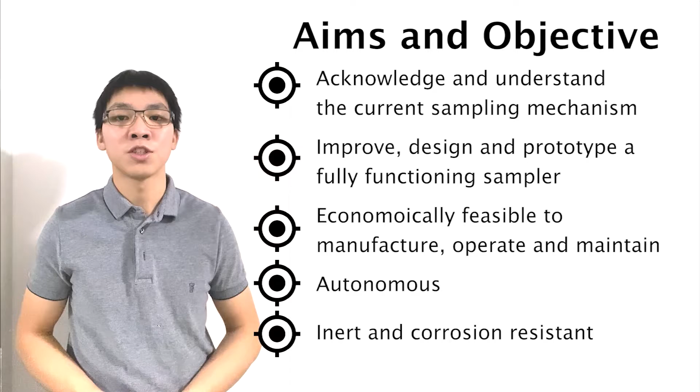Then improve, design and prototype a better version that is both autonomous and economically feasible to be deployed to a developing country. The system has to be simple, robust and reliable with the use of proper material that will not leach or react with chemical compositions or analytes found in water. In order to achieve this, a design flowchart was made. This acts as a systematic guide for the entire project while being able to identify key design phases.

The selection process undergoes the same methodological process in which the best and most suited design will be selected. The selection process includes the use of quality function deployment, Pugh matrix, system comparison, and cost comparison. Cost is particularly important in this design project as the system will be required to be deployed to a developing country. As such, a simple cost comparison was made for the different designs based on manufacturing cost, operating cost, maintenance costs, and replacement costs.

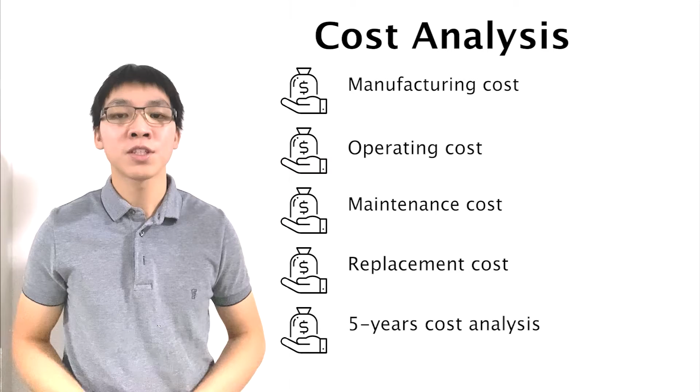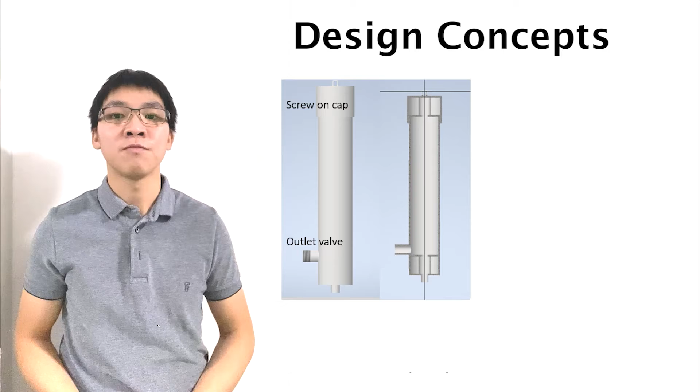The operating cost takes into account the local labor cost for the entire duration of sampling. Adding to that, a 5-year cost analysis was also done to compare its deployment feasibility. A total of 3 design concepts were made. The first design, as seen on the left, is an improved version of the reusable double check valve bailer, and a second design on the right uses a pump.

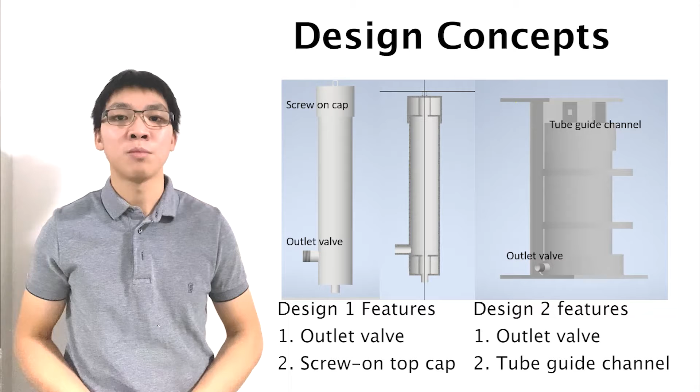Design 1 also has a screw-on top cap that allows the bottle to be accessed easily for cleaning and decontamination. Design 2, on the other hand, features a tube guide channel that acts as a support and guide for the inlet tube to feed water directly into the inlet of the bottle without coming in contact with it. The final and selected design is an improved version of the Van Dorn bottle with 1.5 litre capacity. This design features a newly designed closing mechanism that uses a magnet instead of the traditional messenger.

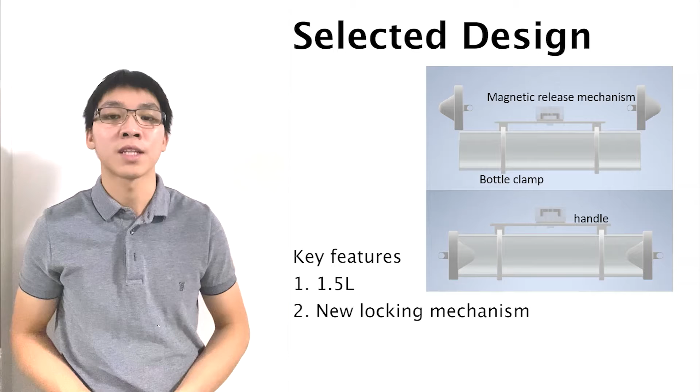This ensures that the triggering of the locking pin is almost certain every single time regardless of how deep the sampling is. Besides, it also has a detachable bottle clamp that allows different bottles to be used for different sampling conditions and environments. The free space beneath the handle can be used to attach in situ measuring sensors. This includes pressure and temperature sensors.

This is a particularly important feature for sampling in the Yamuna River, as the pressure sensor will be able to distinguish between the foam and water layer. On top of that, the use of these in situ measuring sensors allows for different stratified layers to be identified. Here's a short animation of how the bottle will work.

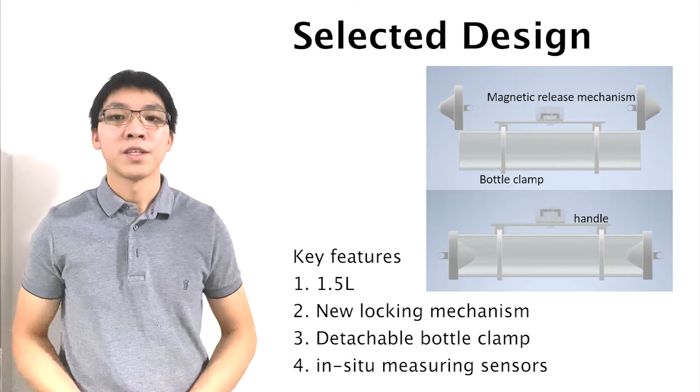Several tests were conducted on the final prototype. This includes a sampling volume test and a leak test. The purpose of the sampling volume test is to understand the sampling limit of the bottle when being submerged in water. It is particularly important that the bottle is filled completely with very minimal gas pockets as they tend to expand when being retrieved. This will affect the sample content.

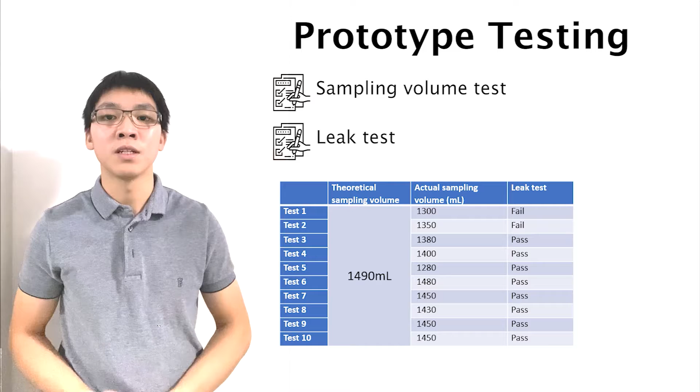The purpose of the leak test is to ensure that the bottle provides a relatively tight seal when sampling. As summarized here, the first 2 leak tests failed because of the latex tubing in the middle of the bottle. Through this test, the process of prototyping can be said to be a success where the bottle is able to perform its necessary tasks.

However, further testing is still required where the bottle will be put under adverse weather and water conditions to allow the operator to fully understand the capabilities of this design. Besides, several improvements can also be made on off-the-shelf components to increase its operational lifetime, to minimize replacement and maintenance. Before I end, how is this autonomous and how will it move?

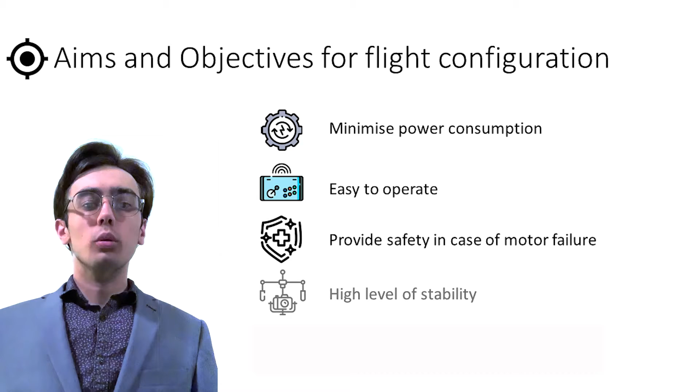It is clear to modify our drone to have a water sampling device attached underneath. It would need to accommodate a moderate payload capacity and possess a high level of stability to facilitate the sampling of water. The drone's flight system would also need to be carefully implemented to allow for a medium flight time, as well as include several safety features to protect the drone and drone operators.

Using a simple and concise design methodology, a suitable solution was developed which could successfully provide the necessary lift required to comfortably fly the drone whilst maintaining a high degree of precision and safety. This was done using common design methods such as a quality function deployment and a Pugh matrix. These tools helped accurately translate the customer requirements into relevant technical specifications, as well as ensure the final design could effectively fulfill them.

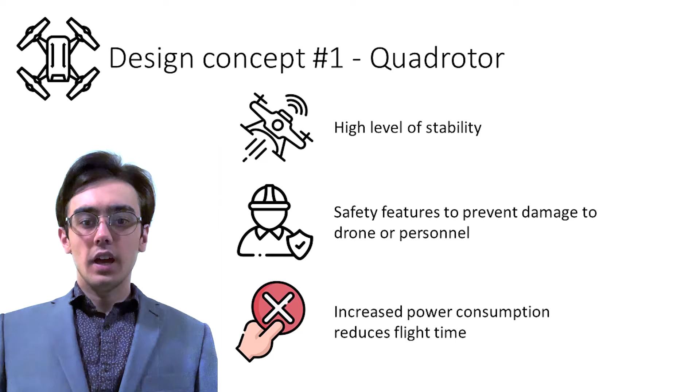The first design concept put forward was a quad-rotor drone. This multi-rotor drone exhibits high levels of stability and is easy to operate and maneuver. More importantly, the rotor configuration is able to use its multiple rotors to help reduce the risk of the drone being damaged in case one of its motors was to malfunction whilst in the air. However, this drone configuration suffers from low efficiency due to the increased power needs from the multiple rotors. To become a viable option, this design would need to minimize power consumption to prolong flight time.

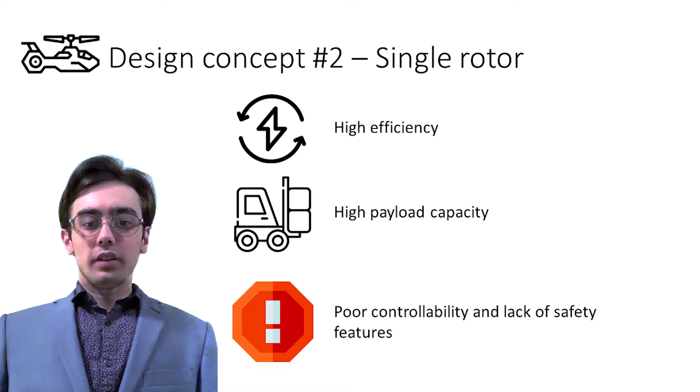The second design concept was a single rotor drone. This drone rotor configuration is very efficient, which allows it to carry high payload capacities for extended periods of time. By only using a single rotor, the length of the propeller blade can be easily adjusted to increase the amount of lift produced. Unfortunately, this drone design is difficult to operate and lacks the backup rotors that multi-rotor drones have. To integrate this design, this drone configuration would need to become easier to control and be modified to include safety features to protect the drone from external damage.

The final design selected for the flight system of the drone was a hexarotor configuration. This multi-rotor drone is able to meet the medium payload capacity required by using an additional 2 rotors. Furthermore, this multi-rotor configuration benefits from the extra 2 rotors, which can be used to safely guide the drone down in case one of its rotors were to cease function mid-flight. To prove this design could indeed provide the necessary thrust to comfortably lift the drone, thrust calculations were performed.

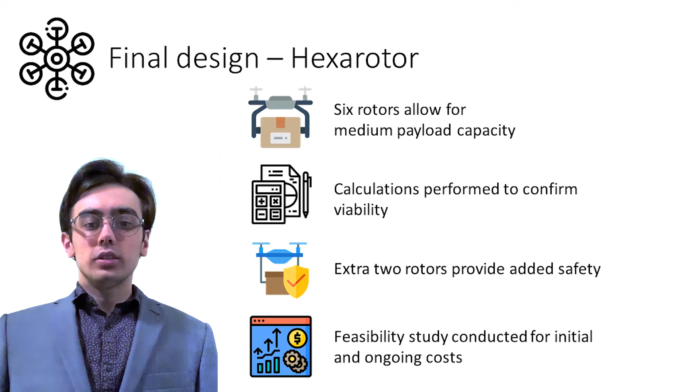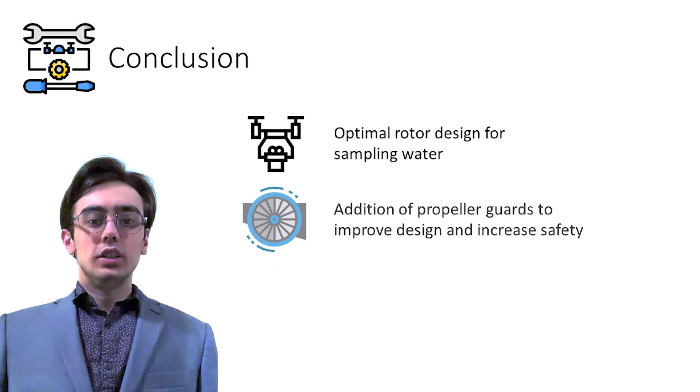Moreover, to further validate this design, a feasibility study was conducted to outline the initial and ongoing cost over a 5-year period. This hexarotor configuration was shown to be an optimal design solution for the purpose of sampling water using a medium payload capacity. To further improve this design, future recommendations were put forward, which included the addition of propeller guards to increase the protection and safety of the propeller blades.

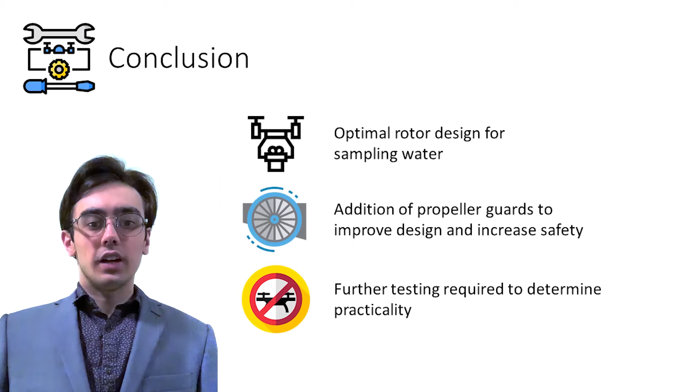Due to restrictions, future testing was also needed to confirm the practicality of this design in the field. Whilst this hexarotor drone configuration was proven to be a feasible design, the chassis would also need to be modified to allow this flight configuration to be fully integrated.

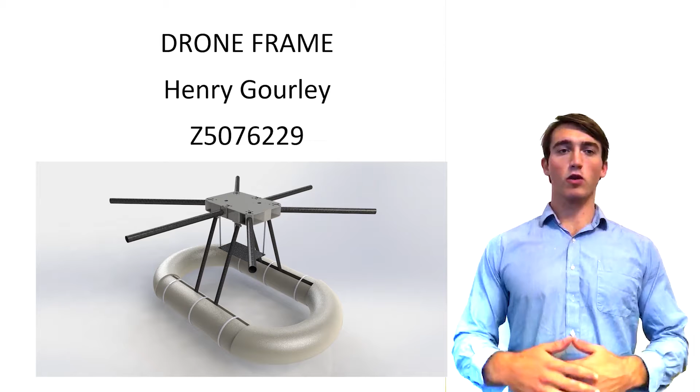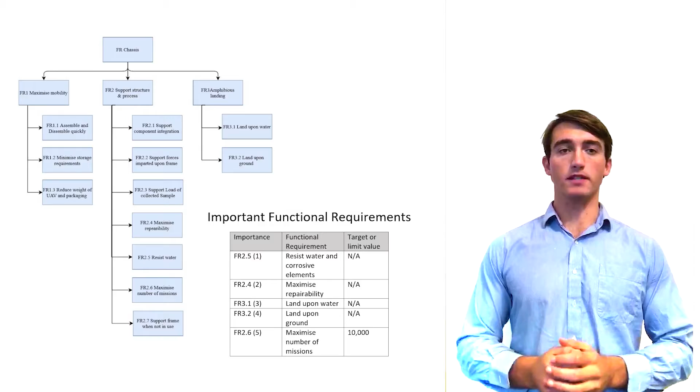Functional requirements relevant to chassis design were developed to optimize stability, structural support, and amphibious capabilities, with a QFD analysis revealing additional consideration and weighting to be given to water and chemical resistance, repairability, durability, and ground and water landing requirements. Corresponding design parameters were then constructed to assist in the development of conceptual designs via a morphological matrix.

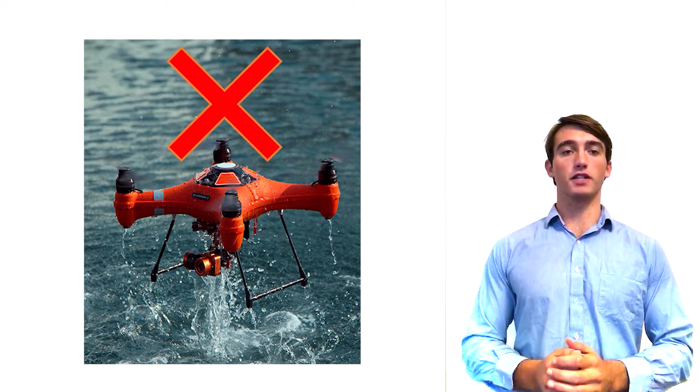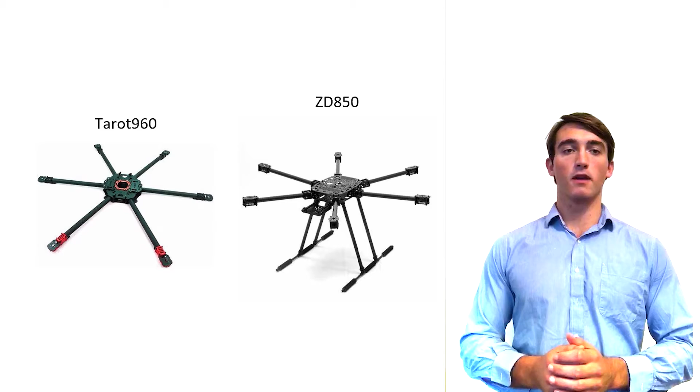Now, Thesis A identified that heavy lift, waterproof drone frames were not commercially available. However, it also revealed the modification of an existing off-the-shelf drone frame to be more feasible than a fully customized frame. As such, the Tarot 960 and ZD850 were identified to best reflect the design parameters of concepts 1 and 2, with a Pugh matrix revealing the ZD850 to best satisfy functional requirements and ease of modifiability.

Foldable propeller arms improve portability, high-strength carbon fibre members reduce weight without compromising structural performance, and a modular system supports repairability. The original ZD850 central housing plates comprise a range of slot and hole configurations to outfit different component integrations. However, the resulting porosity essentially precludes operation in proximity to water.

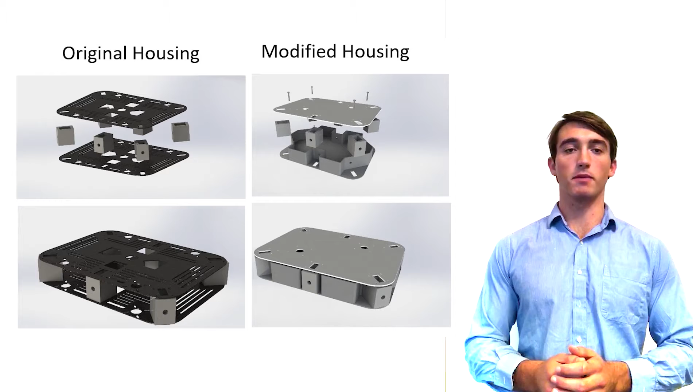A purpose-built drone such as this doesn't require these integration flexibilities, so a customized watertight central housing was constructed from ABS, with 4 reinforced screw mounts added to ensure waterproofing and ease of access for inspection and repair. Weighing only 61 grams more than the original housing, this supports a feasible modification.

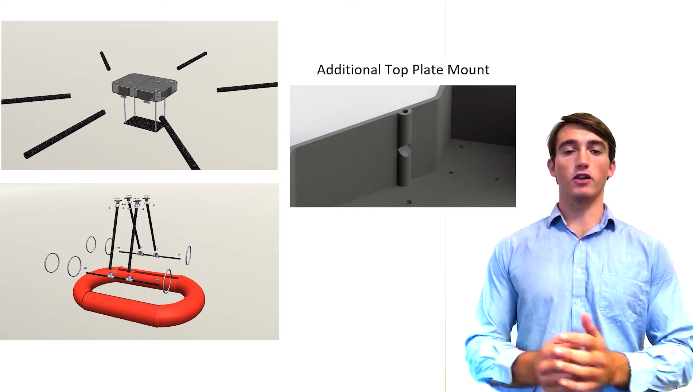Component integration was also designed to align the drone's centre of mass with its geometric centre, thus improving flight stability, and holes were created allowing circuitry to access motors, navigational equipment, and batteries. Carbon fibre members were also sprayed with a UV and water-resistant coating to maximise durability.

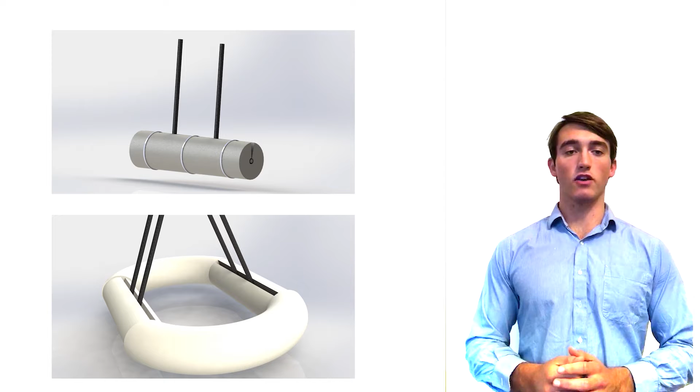Landing legs were outfitted with a closed-cell polyethylene pool noodle capable of providing the necessary flotation to support an additional 4 kilograms more than the expected maximum payload, acting to conserve battery power while sampling and prevent loss over deep water bodies in the event of critical failure.

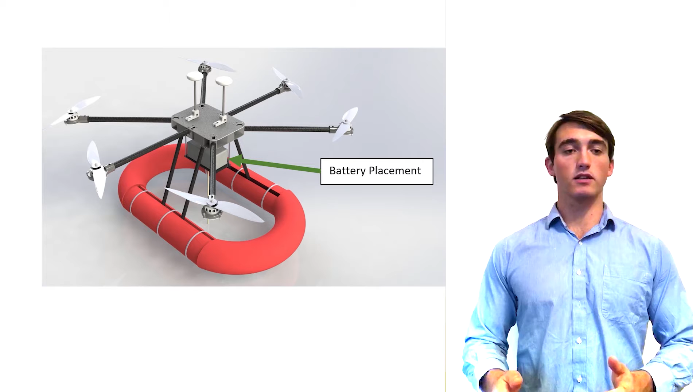The battery was placed upon the bottom rack to lower the centre of gravity from 17 centimetres to 12.5 centimetres above the ground, thus improving stability upon floating. The redesigned ZD850 shown here weighs only 1.25 kilograms and can support an 8 kilogram payload, meaning it is more than capable of carrying the required mass.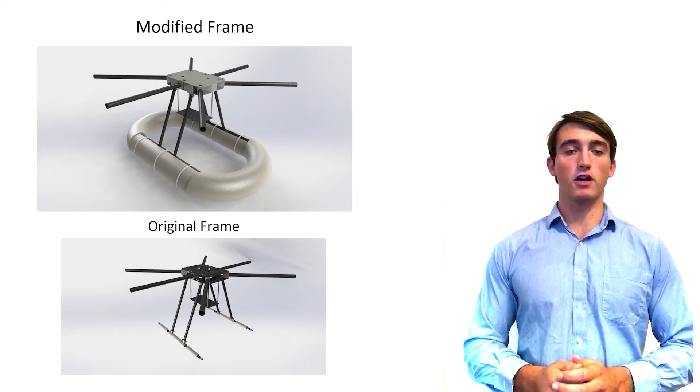I will now pass it over to Alex to talk about flight control and planning. Thank you, Henry. So in my section, I'll be going through 3 of the many hardware and electrical components that will help this whole drone work.

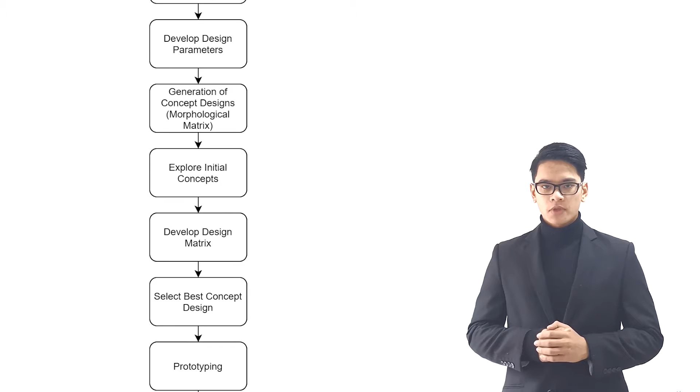The aims in my section were to find a method of manual control, to select the optimal control algorithm for flight stability and maneuverability, to develop a path planning algorithm for optimal trajectory, as well as finding an effective processing unit to process multiple algorithms. So it all starts with a design methodology, where following this framework will ensure my final design is adequate. These are the multiple design parameters that I found, and they all went into a morphological matrix where 3 initial designs were made.

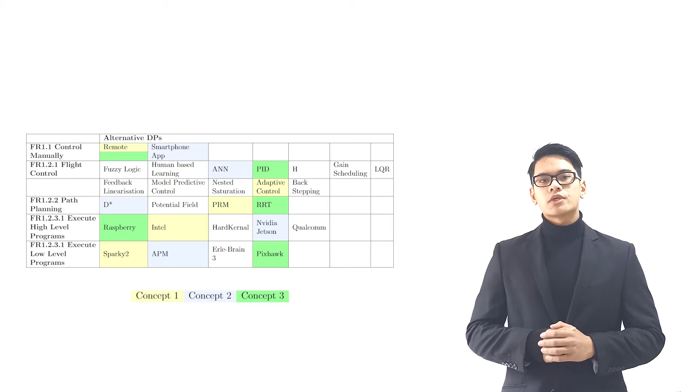So let's get into these concepts. In terms of manual control, the smartphone app has become increasingly popular, where you only need one device for live video broadcast as well as manual control. And it's definitely amazing to incorporate within a product. However, personally developing an application this early in the stages of development does not seem feasible, so a remote control is recommended.

For flight control, the algorithm isn't the only component for stabilization. It's the complex synergy between peripherals. So developing from scratch seems very hard, and purchasing may seem more feasible as they're currently very mature and have been developed over a decade. So 3 path planning algorithms were placed in the same experimental environment, where the D-Star provided an adequate path but a long processing time. The PRM had the same processing time, however, a more optimal path, and the RRT method had a shorter processing time with an adequate result.

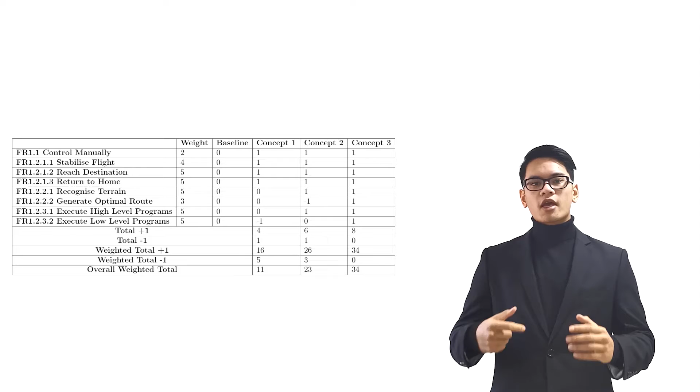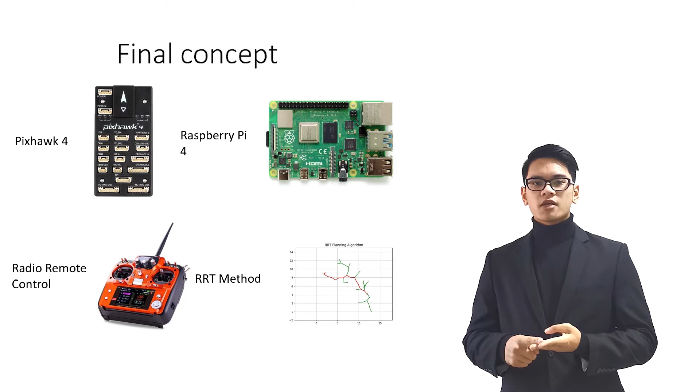A feature cost comparison was made between the high and low level processing units and considered for the final selection. And the concepts and the FRs were compared together through a Pugh matrix, where overall the third concept was decided, which was the use of a Pixhawk 4, a Raspberry Pi 4, a remote control, and the RRT method. So let's get into the final validation of the RRT method.

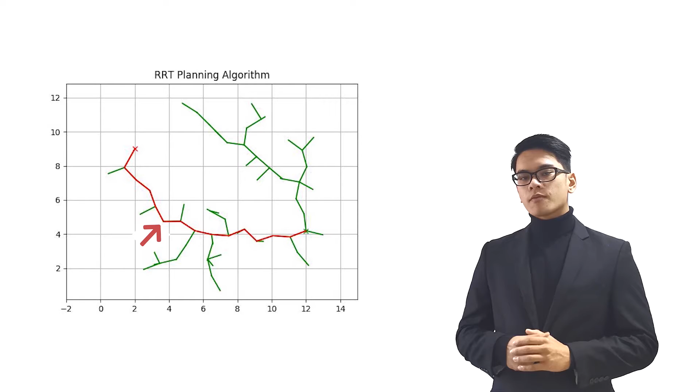And a path planner was made and produced a definite optimal result. So it was also placed into a 3D environment, however no object data could be incorporated due to time constraints. So to conclude, the radio remote control will be used as the manual controller, the PX4 system will be used as the flight control, the modified RRT method will be used as the path planner, and the Raspberry Pi 4 and the Pixhawk 4 are used to execute programs.

So you might ask now, how does it detect the objects? How does it even conduct the mission? Aaron will answer those questions within his section.

Drones were not smart. So far, we have tried our best to guide them with a safe path and hope they can come back. But obviously, this is not enough. As we're sampling along the Yamuna River, we may encounter buildings, people, and other unexpected obstacles. Before we can deploy our drone into public use, we have to address these risks.

Knowing this is an application for a developing country, we aim to develop an autonomous navigation system that is robust and reliable, where algorithms and sensors are tested under real-world scenarios. Operational, where minimum training is required for the safe operation of the system. Cost-effective, where low-cost sensors and less complex algorithms should be selected. Transferable, where systems can be easily set up, deployed, and updated on scale. Weight efficient, where less bulky or heavy hardware is prioritized in selections.

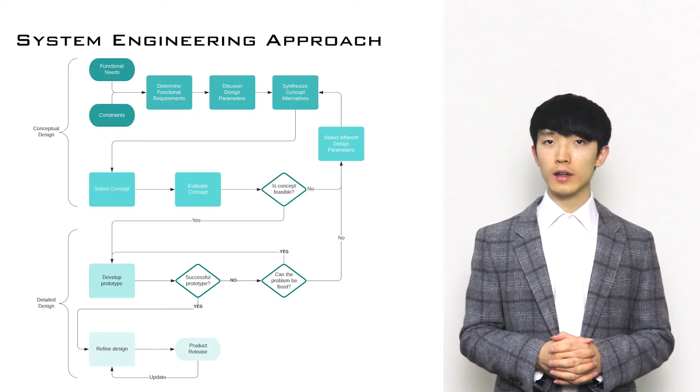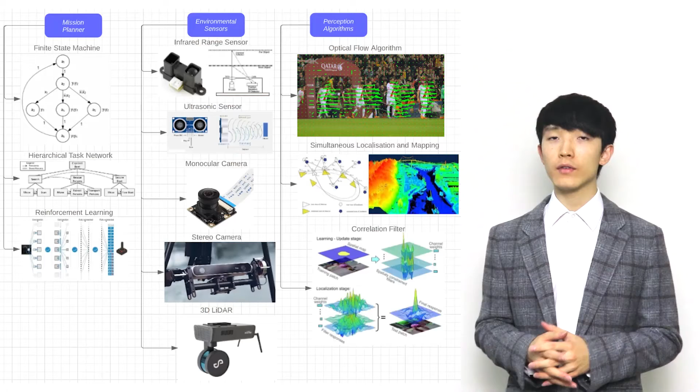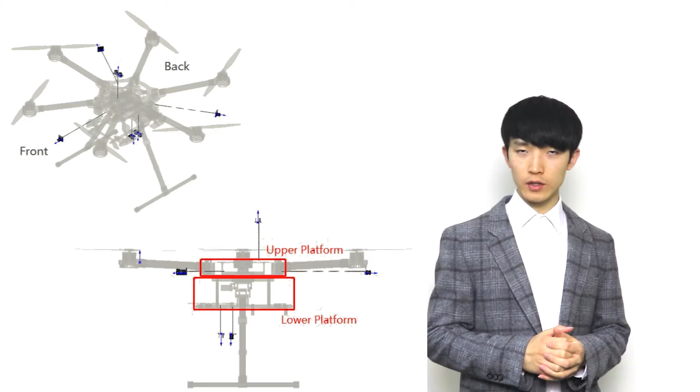We propose a methodology based on the system engineering design approach, which primarily consists of a conceptual design stage and a detailed design stage. In the first stage, we conceptualize our design by determining the functional requirements, finding the corresponding design parameters, combining the components into alternative design concepts, and finally finding the optimal design. Based on the design concepts, 4 subsystems were prototyped and evaluated during the detailed design stage. This includes a finite state machine-based mission planner, a monocular vision-based sensor configuration, an obstacle avoidance algorithm, and a tracking algorithm for safe landing. Let's demonstrate our result with an example.

In typical water sampling missions, the autonomous system starts with the mission planner, where the high-level behaviors are managed using the finite state machine. When the mission starts, the planner system will invoke a series of checks and analysis before the drone takes off. Once the drone is ready, it enters the central task control state, where it kickstarts path planning and begins navigating. During the flight, the system continues to avoid obstacles through an optical flow algorithm. When the vehicle returns to landing, the downward-looking camera is triggered and the tracking algorithm finally guides the vehicle to a precise and safe landing.

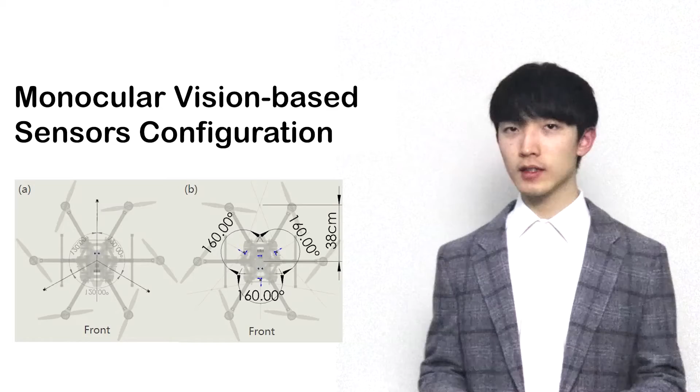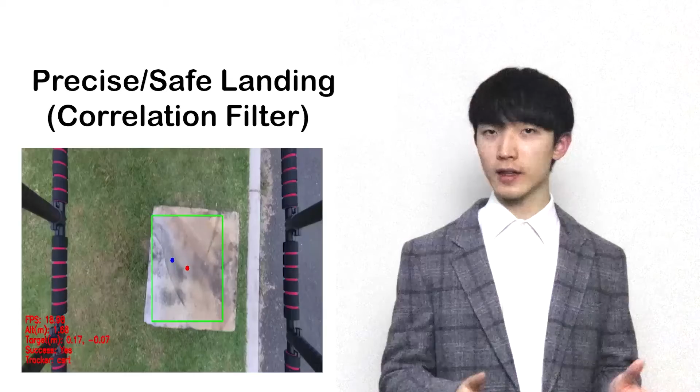To conclude, we develop a finite state machine-based mission planner to handle a variety of situations during a multi-stage water sampling mission. A monocular vision-based sensor configuration that facilitates near-water altitude measurements and a full coverage in field of view. An obstacle avoidance algorithm to detect and avoid obstacles in a critical range of the vehicle. And a tracking algorithm to check the landing site and guide the vehicle for the safe and precise landing. The entire system costs $200 in hardware, but runs at 18 Hz in control frequency. As a result, a simple, robust, yet cost-effective navigation system was developed.

Now we have the ability to automate the systems. There's another essential component for making all this electronics alive throughout the mission. Here, we'll have Anthony to talk about our power system.

Thank you, Aaron. In the power and prognostics portfolio, I addressed a few things. What is the power source? How will it be diagnosed? And how long will it last during missions? The methodology firstly undertakes a selection criteria of components for power and power management devices. This sets the foundational work for software to be implemented on. Then, we compare against various machine learning methods. Finally, implementing the modeled, trained, and evaluated machine learner into an application of the drone.

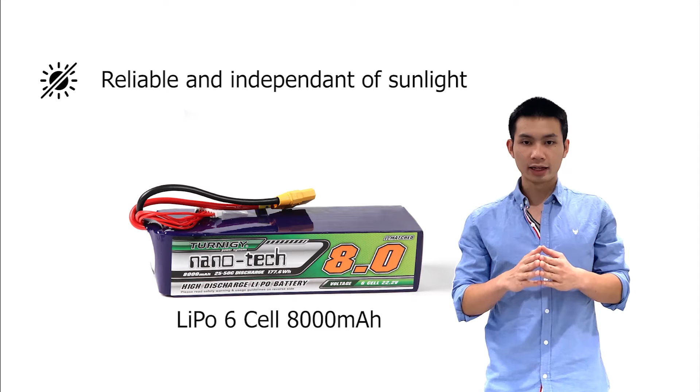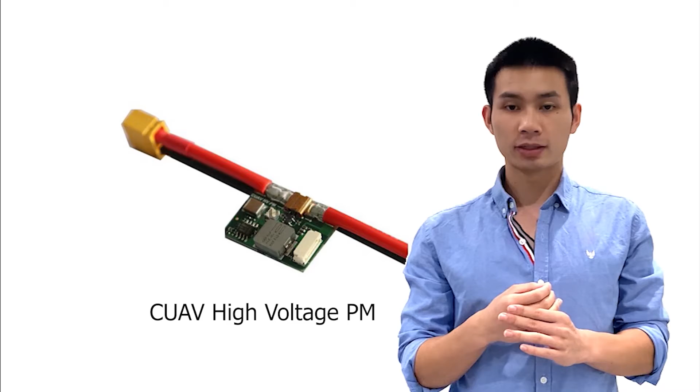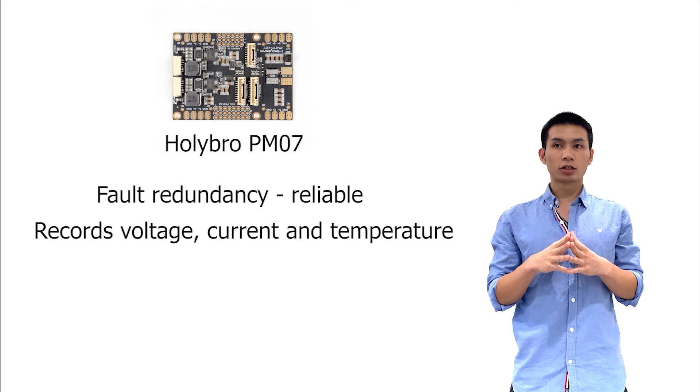The power source is compared with 3 types: solar photovoltaic, hydrogen fuel cells, and lithium polymer batteries. We've selected the lithium polymer battery, which is independent of the weather and can be maintained in our chosen location. Then, 3 power management boards were used for justification: the Mauch Power Cube, CUAV HVPM, and the Holybro PM07. The driven selection was to choose a PM07, as it provided power fault redundancy, senses multiple readings such as voltage and current, and was the most economically affordable at $66, which is the lowest of the cost options.

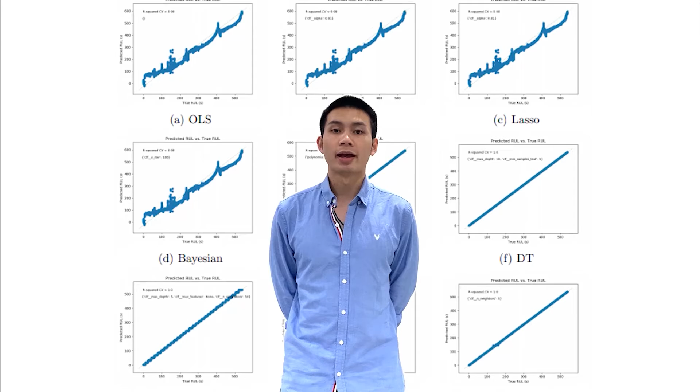Finally, for the prognostics, 9 different machine learning methods were built, modeled, and evaluated. For predicting remaining useful life, I've compared each against its accuracy and computational resource required to justify an appropriate solution. The final justification is the decision tree regression, with the need of only 0.007 seconds to train and an accuracy of almost 100%.

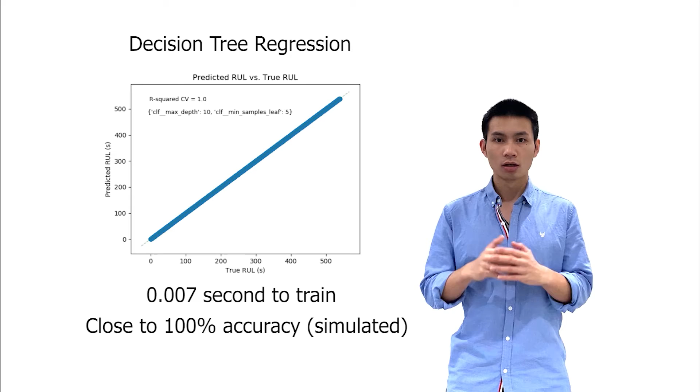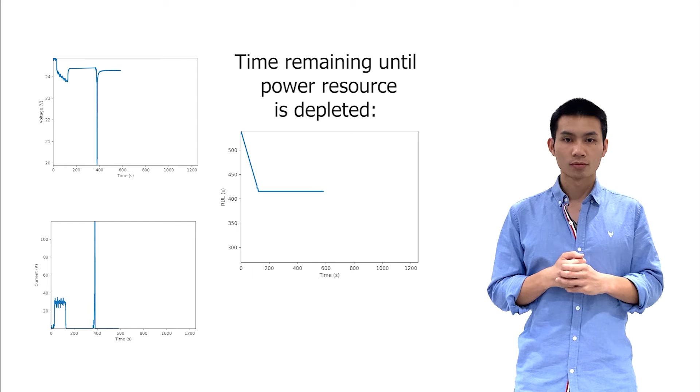Here is a live stream of how the battery is monitored with voltage and current, as the decision tree also predicts the remaining useful life of the battery during the flight. All these design considerations are housed in a software architecture as a preemptive method to safeguard the user from damaging the battery, preventing over-maintenance and sustaining the uses of the drone.

But how does it all communicate? We have Dylan next to explain the communication system.

Thanks, Anthony. The aims and objective of the communication component is to create a robust communication structure to be used by the UAV. The methodology for design is to first determine the requirements needed for the communication system. After that, the radios will be selected and a material will be chosen to house the components. The second part of the design is to optimize it for range.

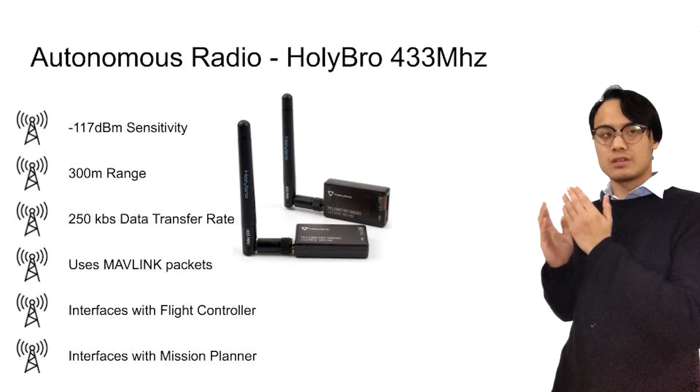The autonomous radio selected is the HolyBro transceiver. This radio was selected as an interface with the flight controller system, as well as it uses MAVLink protocols, which is used by the mission planner. For the manual radio, the R12DS radio was selected. This radio met all the required performance parameters. The deciding factor for this radio was that it has an inbuilt pairing system which allowed it to be used

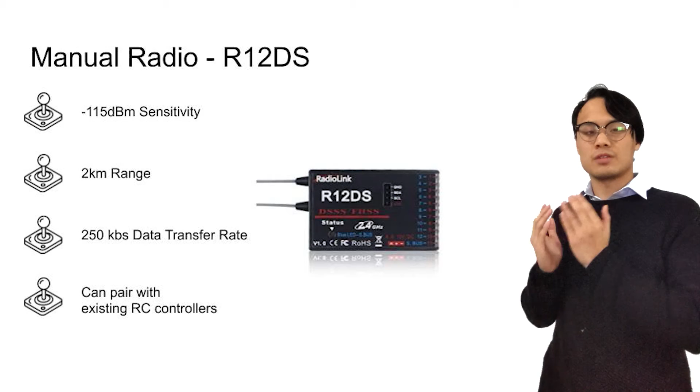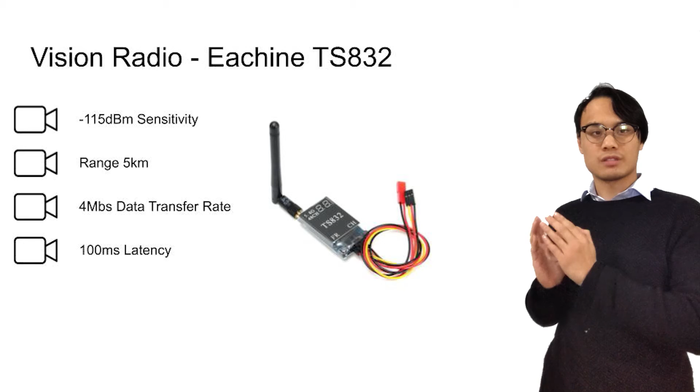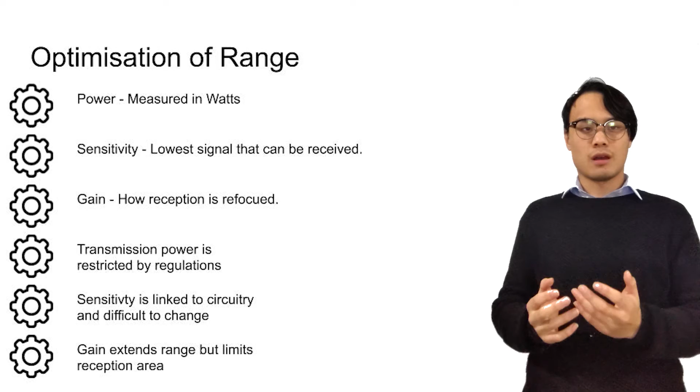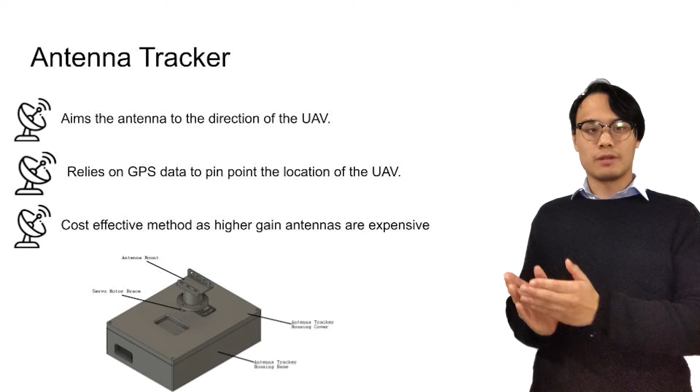The parameters that affect the range of the transmission include the power of the transmission, the sensitivity of the radios, as well as the gain of the antenna. The only feasible parameter that could be changed from this list is the gain. However, increasing the gain would decrease the reception area of the antenna. A workaround of this is the antenna tracker. The antenna tracker processes GPS data and repositions the antenna so that it's constantly facing the UAV. This is a cost-effective method of maximizing range.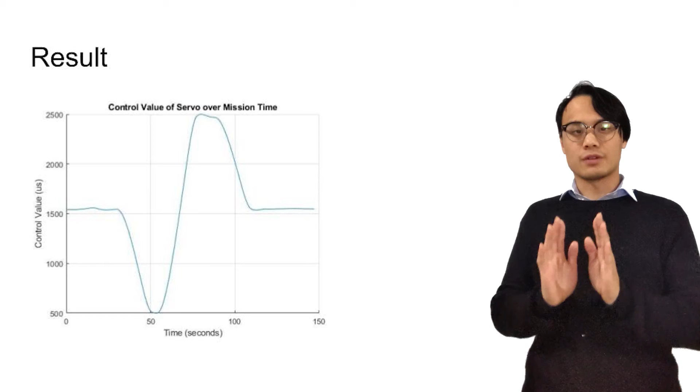Some future work for this project would be physically manufacturing the components to test the strength and water resilience of them, as well as testing the range capabilities of the antenna tracker with the radios. I would like to present the complete integration of all our parts.

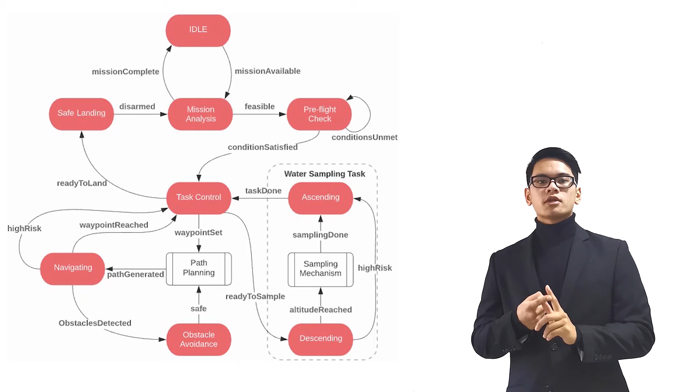The implementation of a finite state mission planner allows for the automation of this whole system, where we use the Raspberry Pi 4 that allows for the synergy of camera, sensor, path planner, power module, flight control, and radio data for mission completion. As you can see here, this is the schematic of the electrical components, where the battery is connected to the PM07, which predicts the remaining battery life, and it also powers the flight controller.

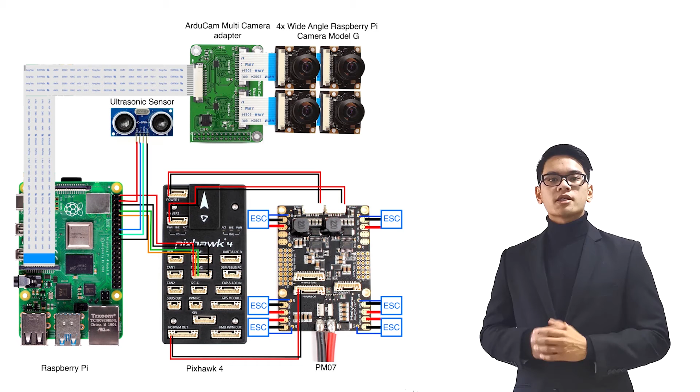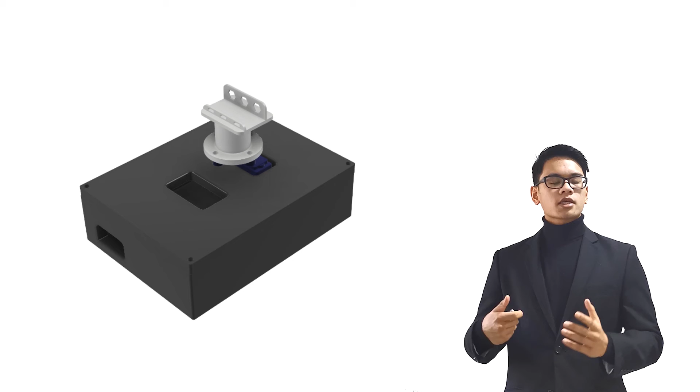Cameras, sensors, and radio are connected to the Raspberry Pi such that the data can be used in these algorithms, and the Raspberry Pi is connected to the flight controller for transmission of data for mission execution. Furthermore, as Dylan mentioned before, the antenna tracker was incorporated at the ground control that tracks the GPS coordinates of the drone to overall increase the signal strength.

Now you might wonder, how much does this all cost? And is this a waste of money compared to the current water sampling methods around right now? Brandon will continue with his section, where he conducts a feasibility analysis.

To understand the feasibility of this solution, the manual sampling method will be used as a reference. The initial and ongoing costs of both methods will be broken down and analyzed. The initial cost of the autonomous solution involved several components such as the power of the drone, the sampling system, communication, chassis of drone, flight control and path planning, navigation and mission control, and rotor and aerodynamics.

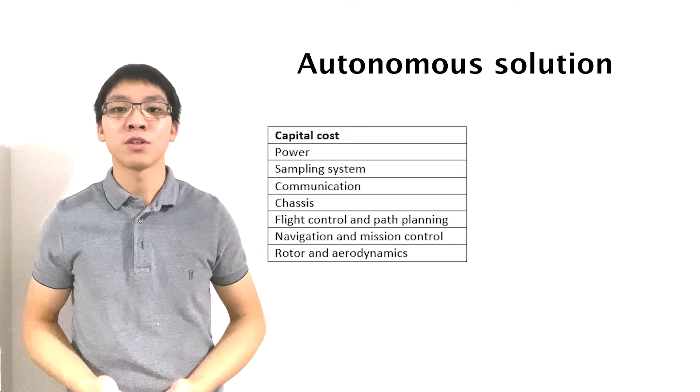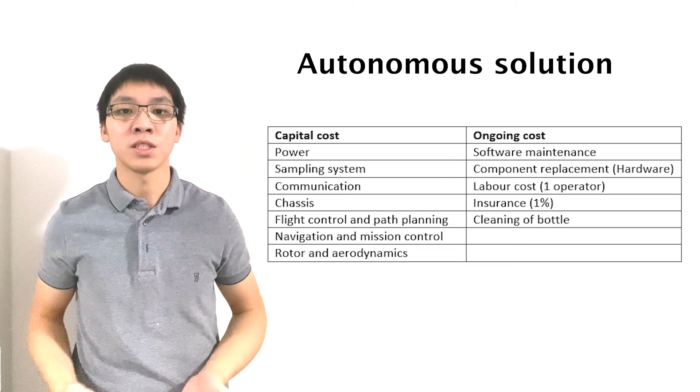The initial costs incurred for these components are mostly related to the programming of software to operate the drone. The ongoing costs incurred would mainly be for the system maintenance of software and component replacement of hardware. Besides, labor costs, insurance, and cleaning will also be taken into consideration. While the initial cost for the manual sampling method would be the cost of the sampling bottle only, the ongoing cost would be the cost of labor, insurance, cleaning, and boat hire.

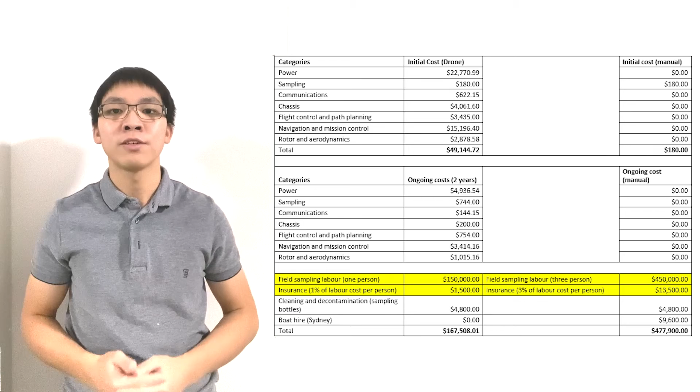An incremental cost analysis was also conducted to understand the total cost incurred to manufacture a second drone for future reference if a larger scale operation requires the use of more drones for simultaneous sampling in different locations. The cost of a second unit onwards would be 7,000 with the ongoing cost of 3,500. The significant reduction in cost for the subsequent drones comes from the software aspect whereby all drones manufactured can and will use the current software as the first.

As seen, the capital cost for the autonomous sampling method is extremely high. However, the savings on ongoing costs when compared to the manual sampling method would enable the operation to run for at least another 4 years. I would like to pass the remaining time to Henry to talk about the social and environmental impacts of this solution.

A California study found that for package delivery, drones emitted 54% less greenhouse gases than trucks. With traditional sampling techniques in the developing world typically involving two-stroke powered boats, these emission savings are undoubtedly higher than 54%. However, researchers found drone activity can affect wildlife, with resulting physiological and behavioural stresses potentially leading to higher energy expenditure, decreases in reproduction and survival rates, and space use changes.

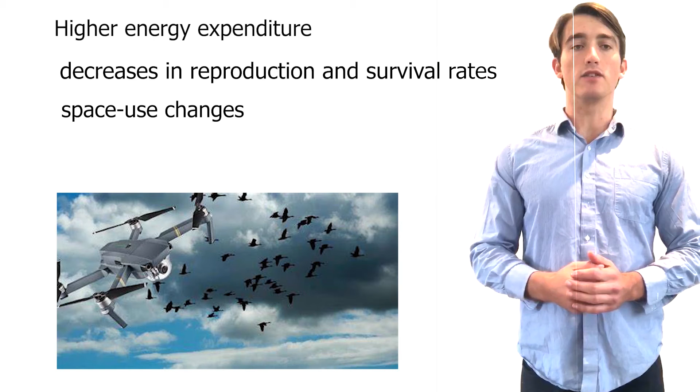It is recommended a biodiversity analysis be conducted prior to sampling to identify large endangered birds of prey who are prone to fight or flight responses and attempt to mitigate potential harm. Appropriate actions following identification of unhealthy water systems promote long-term environmental health benefits that will see improved biodiversity, sanitation, water purity, and sedimentation, leading to significant decreases in the number of waterborne diseases that kill millions of animals and humans every year.

Water access improvements also reduce developing nations' reliance on aid packages and promote opportunities for women who are often responsible for collecting water, taking time away from work, school, and family, and thus assisting in the cycle of poverty. Implementation of a drone sampling program would also upskill the workforce and create a range of new jobs. Overall, the environmental and social benefits resulting from drone sampling far outweigh the potential detriment. I'll now pass you over to Aaron.

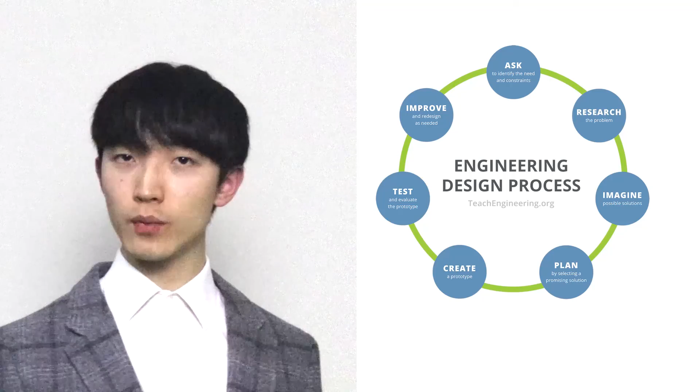Thank you, Henry. To summarize, Yamuna River in India was selected as a representative region for analysis throughout the project. After a comprehensive review of related literature, we decomposed the system into a mechanical system and an avionics system. Each subsystem was developed through a complete engineering design process, subject to the requirements and limitations set out by the user in developing countries. For our mechanical systems, we have developed a novel horizontal sampling mechanism, a hexarotor configuration with optimized propellers, and a lightweight chassis design that facilitates amphibious operation.

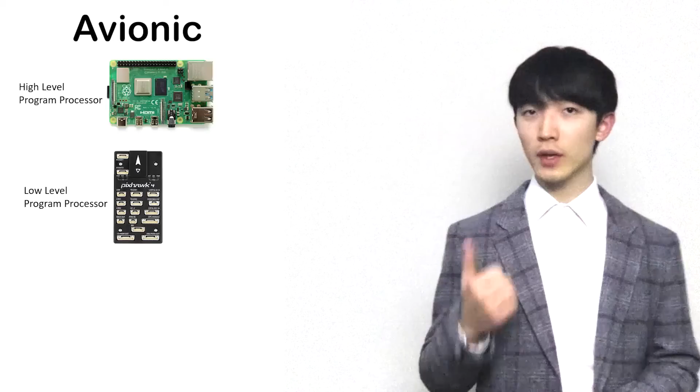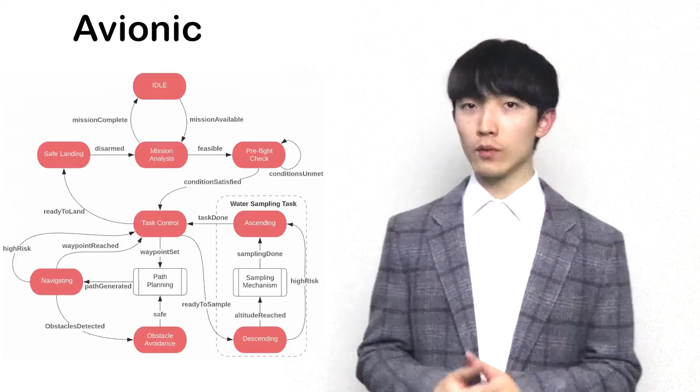For our avionics systems, we have integrated a flight set using Pixhawk 4, Raspberry Pi 4, and a radio remote controller. A complete autopilot using state-of-the-art vision-based navigation, finite state machine mission planning, and rapidly exploring random tree path planning was developed. In addition, we have also designed a learning-based prognostic algorithm and an antenna tracker to improve our power management and communication system.

The integrated solution has demonstrated promising capabilities in sampling water autonomously in Yamuna River, while requiring significantly less cost and being faster than most existing techniques. In conclusion, as a result of this project, we have successfully developed an autonomous water sampling UAV system that has a high potential in improving the water resource management in developing countries.